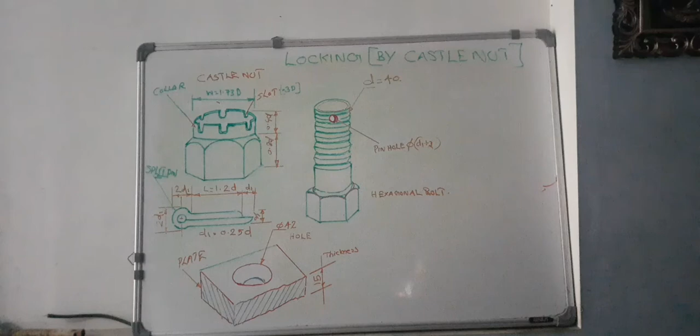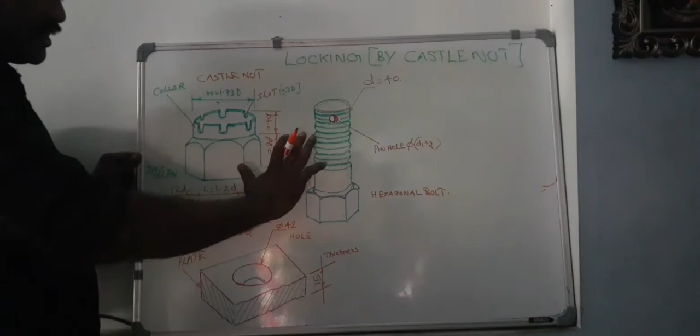Dear students, in this class we are going to discuss another type of locking arrangement. Its name is locking arrangement by castle nut. Here in this board there are four different parts associated with this locking arrangement. Namely, first one split pin, second one castle nut, third one its bolt with a pinhole, and finally its plate.

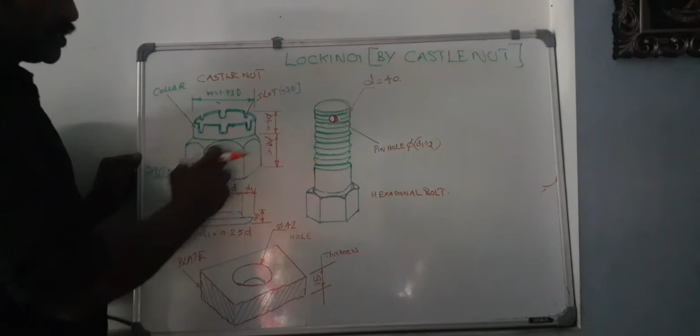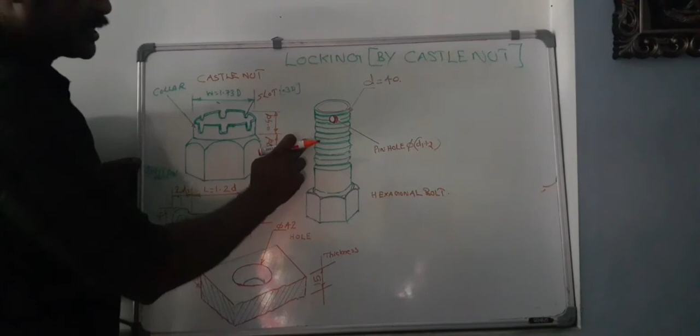Here these four parts are joined together by means of a split pin. See, we are starting from the split pin. Here from this figure we can understand what is its diameter. See, diameter is represented here, that is d1. The d1 is its diameter. Its value is 0.25 into d. That means our bolt diameter is d. Its value is given, that is 40. So we can find out the split pin diameter.

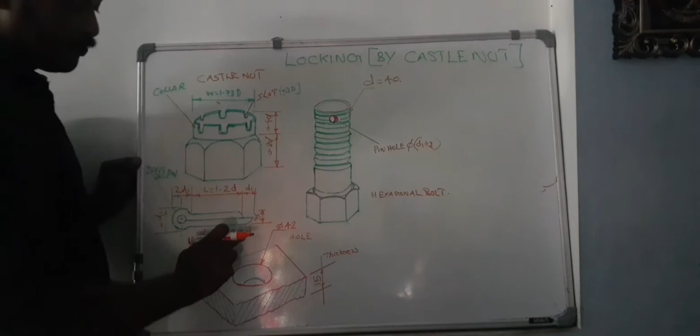Split pin diameter d1 is equal to 0.25 into d. d is 40, so 0.25 into 40 is equal to 10 millimeter. So our split pin diameter is 10 millimeter, and this length is also d1, that is also 10 millimeter, and the split pin has a head. Its value is 2d1. We know that d1 value is 10. So 2d1 is 20, and this is also 20, and this length is marked as L.

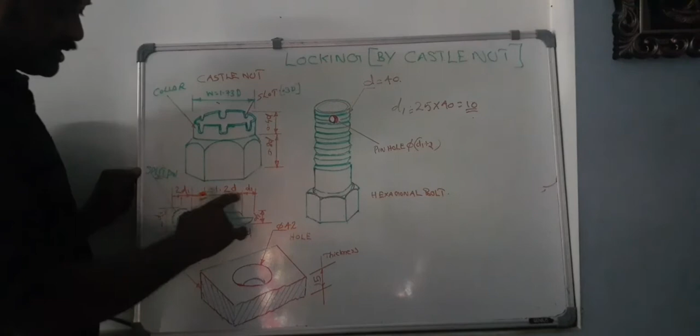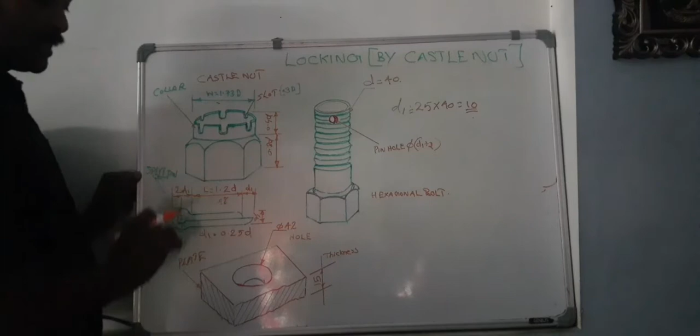Its value is 1.2d. So we know that this is d, so we can replace d with 40. Then this length is 1.2 into 40, that is 48 mm. So we have to understand the dimensions related to the split pin. Okay, now this is one of our main parts. Its name is castle nut.

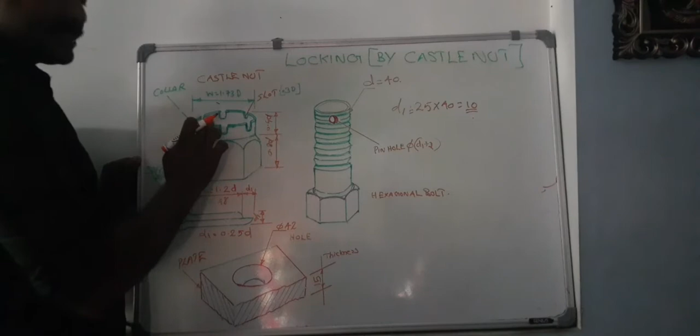A castle nut is a normal nut having a collar as an integral part. At the top portion of the normal nut a circular slotted collar is placed. Here we can see that there are 6 slots. The slot dimension is 0.3d. We know that d is equal to 40. So slot width and depth are equal to 0.3d, that is 0.3 into 40, equal to 12 millimeter. There are 6 slots of 12 millimeter provided at the collar.

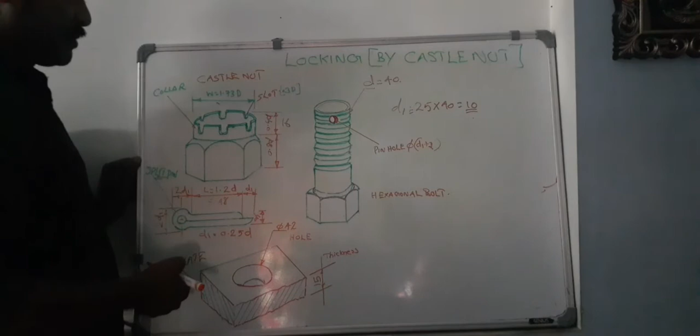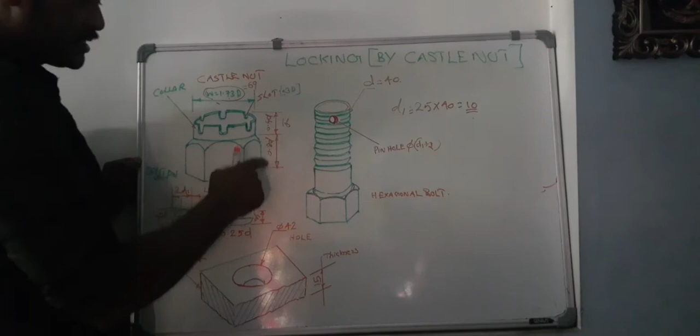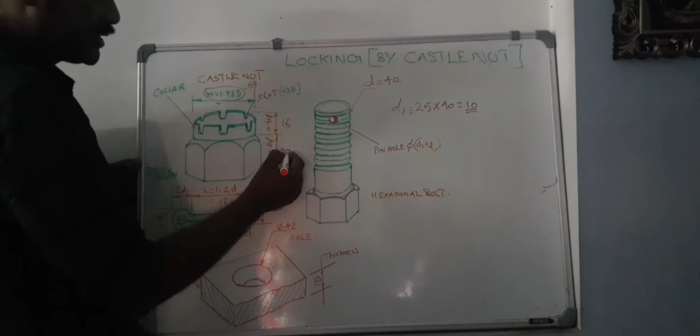And the collar has a height, its value is 0.4d. d is 40, so 0.4 into 40 is 16 mm. And the width is also given in terms of d. Its value is 1.732 into d. d is 40, so applying d in this formula, we get 69. And this is the height of the nut. Its value is 0.8d. d is 40, therefore 0.8 into d is equal to 32 millimeter.

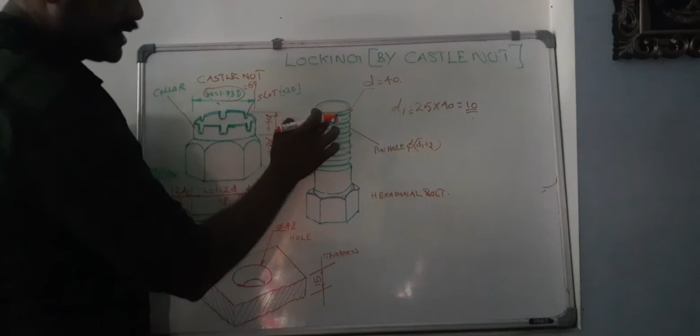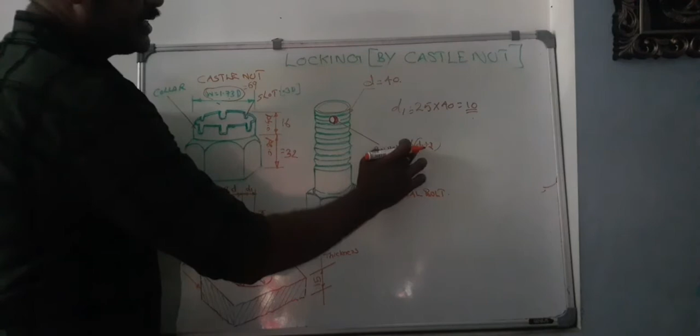Now look at this figure. This is our bolt. A normal bolt, at the end of the bolt there is a pinhole, a portion provided for inserting this split pin. The hole diameter is d1 plus 2. We know that d1 is equal to 10. So d1 plus 2, its hole diameter is 12 millimeter.

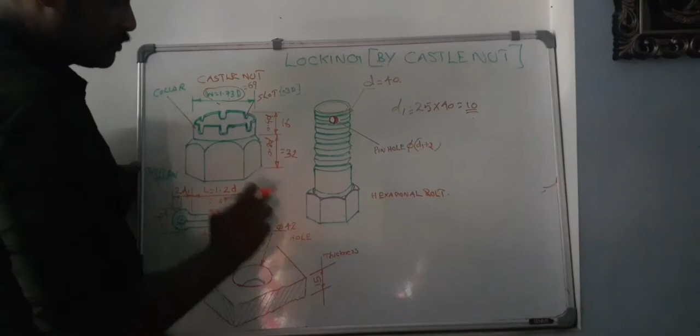And finally the last one, this is our plate having a thickness of 15 mm, and at the center portion there is a hole with diameter 42 mm. We know that our bolt diameter is 40, so we can easily insert this bolt into this hole, providing a 2 mm clearance. So we can assemble all these four elements together.

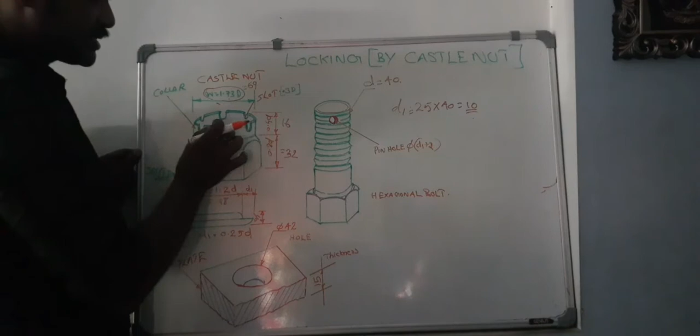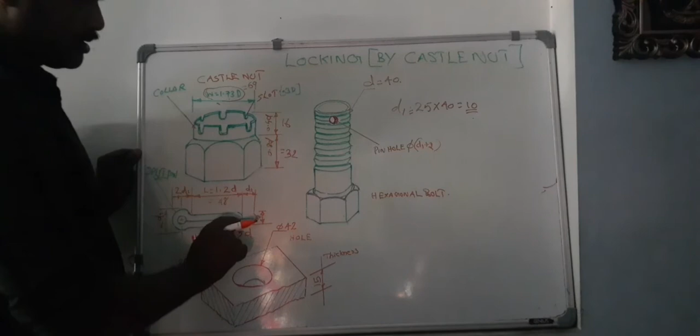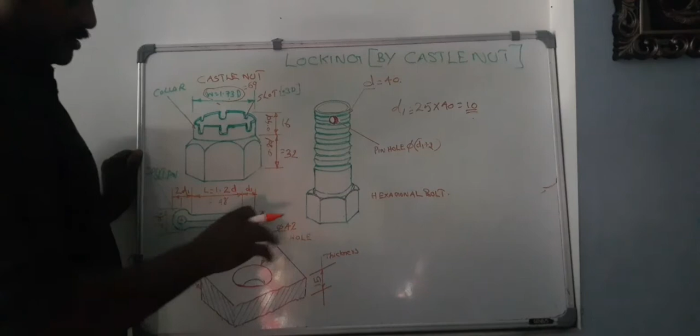First we take the plate and insert the bolt into this hole, and after inserting the bolt into the plate hole, we can tighten this castle nut with this bolt. After tightening the nut, we fix the split pin into the hole, adjusting the slot aligned with the hole, split the split pin and lock this arrangement. Okay, so now we can see how to draw this arrangement in engineering drawing.

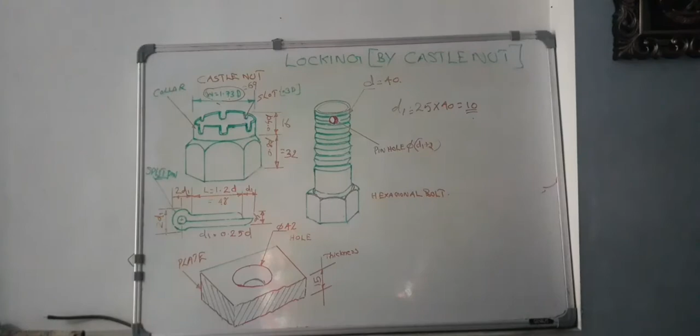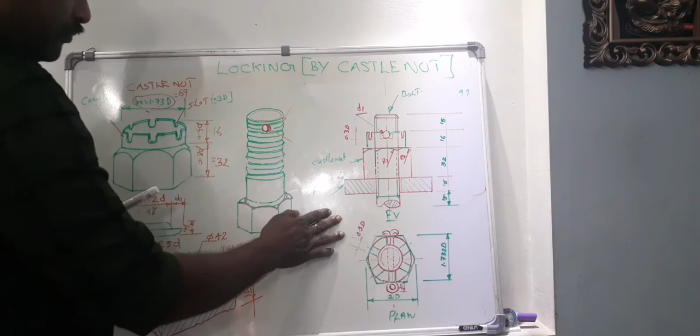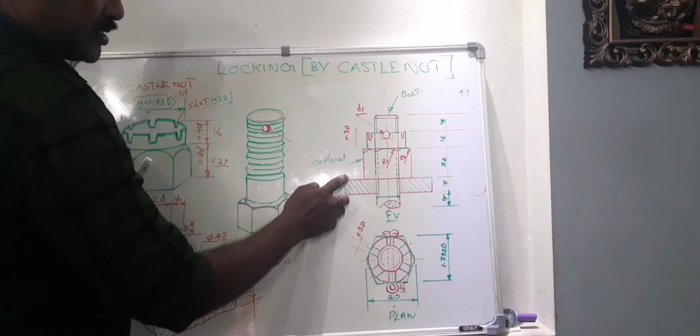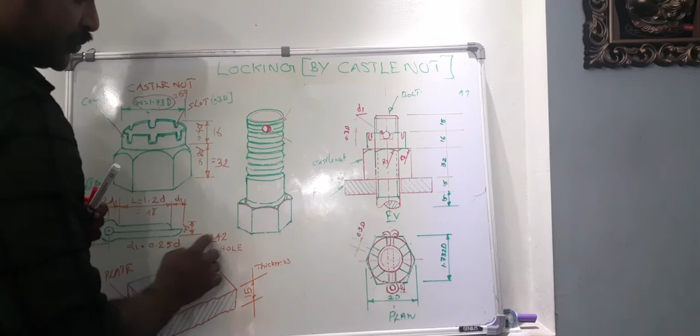Okay, now listen here. This figure shows an assembled view of the castle nut arrangement. This is our front view. This is our plan. In our front view, we can see that this sectioned portion having 15 mm thickness is our plate. The plate has a hole with diameter 42. This line indicates the hole diameter, 42, and 15 mm thickness.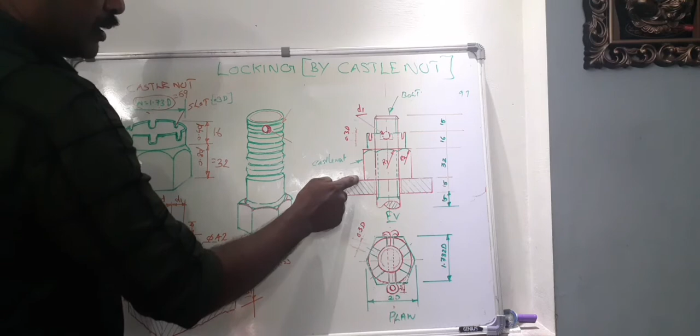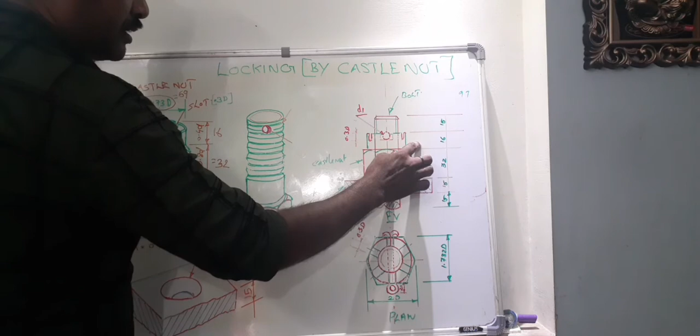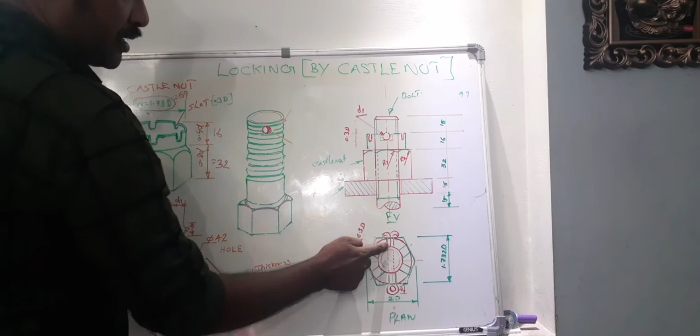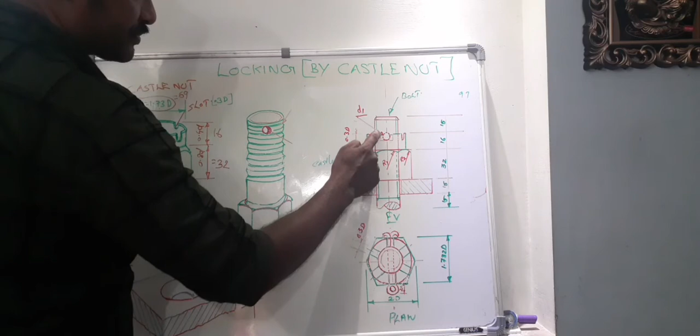Above the plate surface, we can see another element, our castle nut, having a nut height of 0.8d, that is 32 mm, and after that the collar height, 0.4d, that is 16 mm, and above the collar portion there is a projection of the bolt with height 15 mm. At the center of the bolt there is a dotted circle that shows our split pin diameter, and there is a rectangular slot here. That is the size of the split pin head.

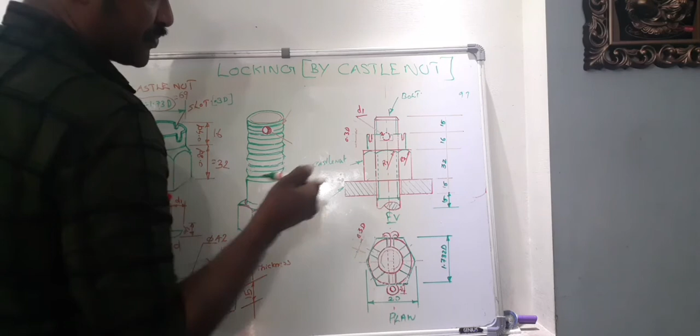Similarly, there is a green thin line passing from the top to this thread limit line. This line indicates the core diameter. We know from earlier classes that the core diameter of the bolt is 0.8d. And our bolt has diameter d. At the nut surface, two radii are marked, R1 and R2. In an earlier class we discussed that R1 is 1.732d and R2 is 0.43d.

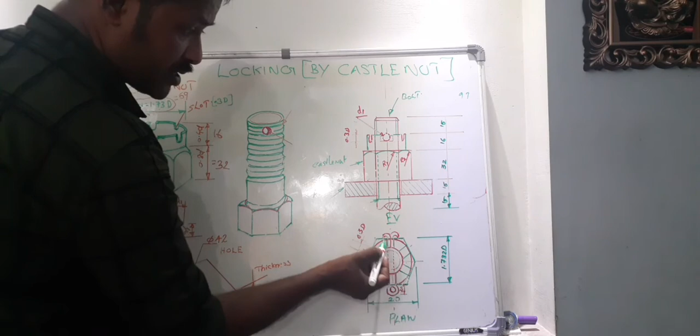Now look at this view. This is our plan. We can project all the vertical lines downward and transfer all the data associated with this hexagon. We can construct a hexagon likewise. After projecting the plan, we draw 6 slots at the 6 sides of the hexagon, keeping 0.3d value. That means the slot width is 12 millimeter.

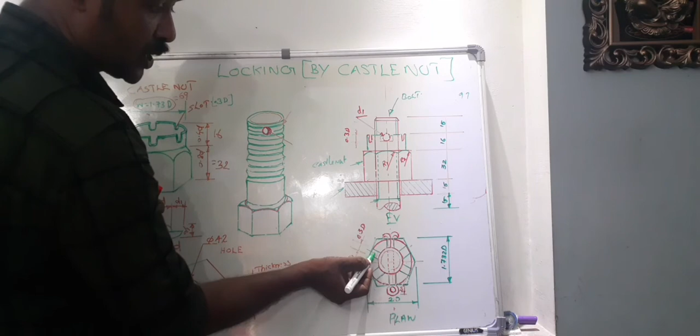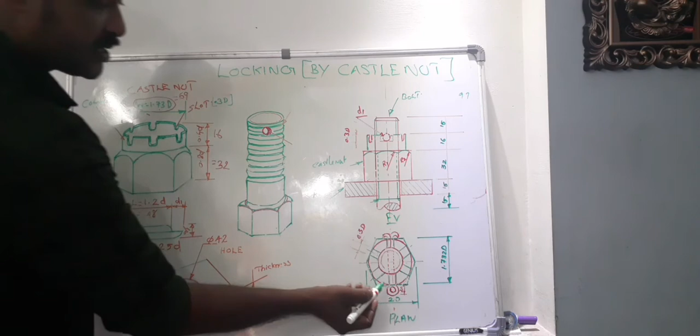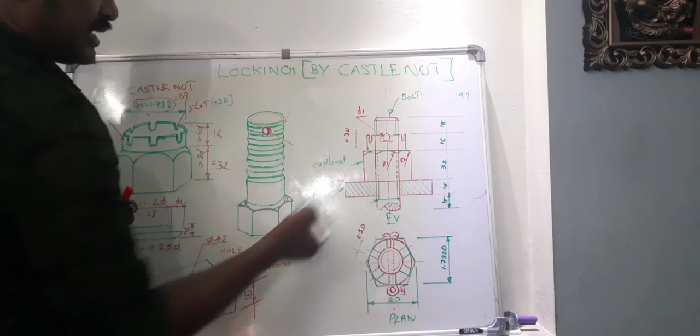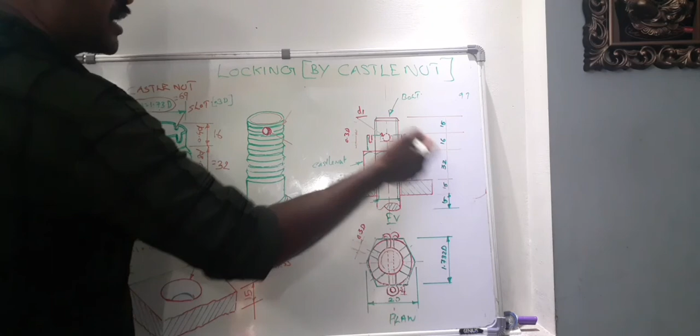We know that our split pin diameter is 10, so we can easily insert this pin into this hole. After inserting the pin, one end of the pin is slightly widened. Then we can lock this arrangement. So first we draw the center line, draw parallel vertical lines and parallel horizontal lines keeping these dimensions, and project the plan downward. Then we can complete this view. Okay, this is an assembled view of the castle nut.